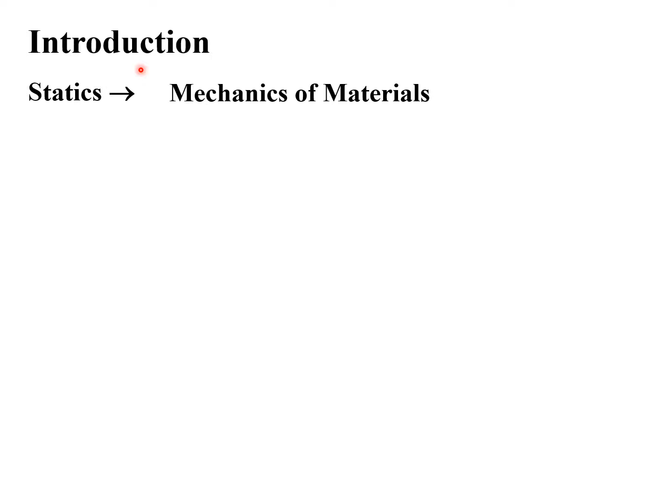The prerequisite for this class is statics, but statics itself is not enough for mechanical engineers or many other engineering disciplines. We have to go from statics to actual mechanics of material, because in statics, when we deal with material or components, we often say the material is so-called rigid body. What does that mean? It means the material will not deform or break under the load you apply. But that is a highly idealized situation.

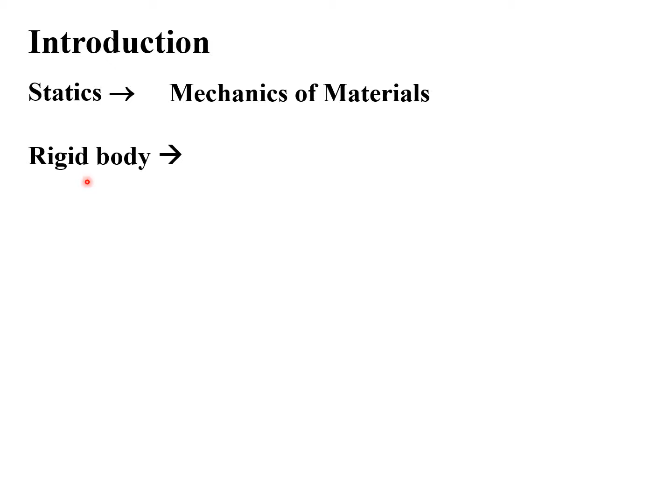In reality, we deal with practical engineering materials that have certain elasticity or plasticity. They change shape upon application of load, and when the load is too high, they may break or fracture in various ways. Because of this reality, our knowledge has to gradually evolve from dealing with only rigid body to practical engineering material, from pure statics, a highly idealized situation, to actual mechanics of materials.

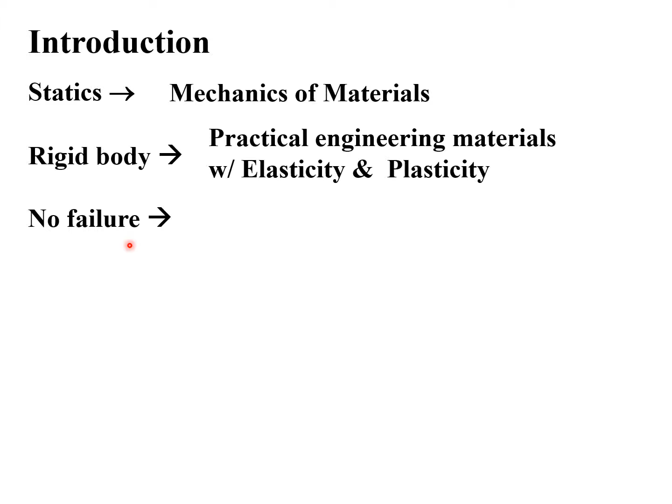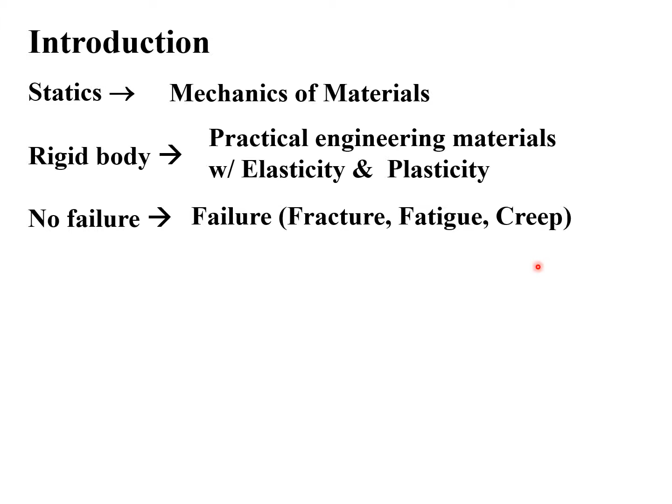When we deal with rigid body in statics, we don't even consider any failure. But in reality, as the load increases, at a certain point, no matter how strong or hard the material is, we will see failures in the form of fracture, fatigue, or creep. That's what we are going to cover in this class.

This class, statics and mechanics of material, will serve as an important foundation for many other advanced courses in mechanical engineering as well as related disciplines. For example, for your future mechanical design, finite element analysis, and synthesis of engineering mechanics, all these more advanced junior or senior level classes would be based on this class. That's why we teach mechanics of material after statics.

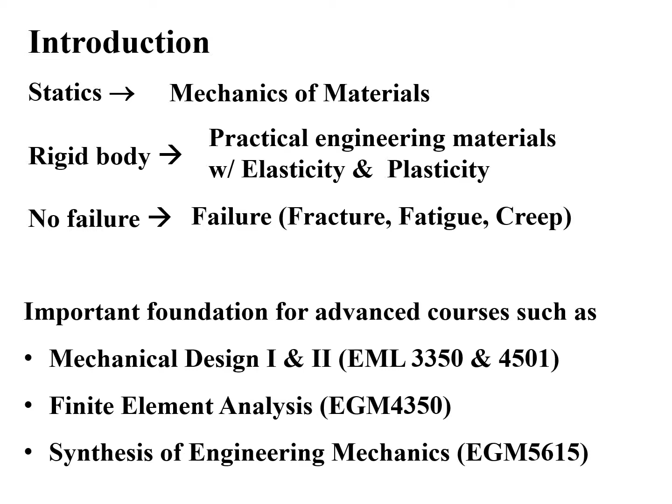Before we go into the content, let's look at some examples of so-called material failures, specifically mechanical failures. Here I have a photo of a collapsed bridge near FIU. From a mechanics point of view, it's a failure of the concrete and related cement and steel material that engineers use to construct this bridge. That's an actual example of failure of material under certain load.

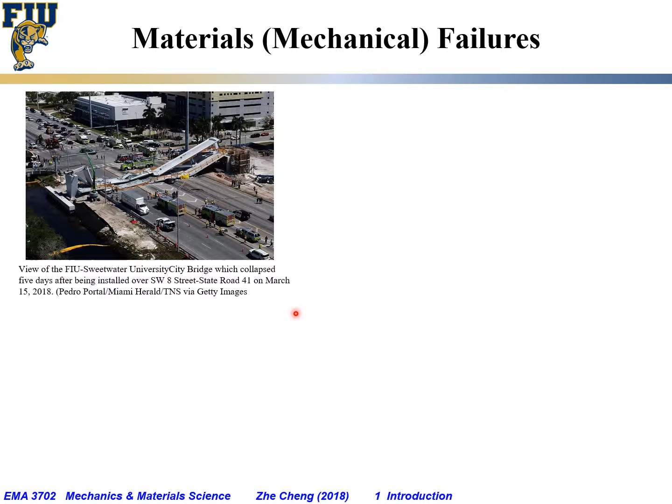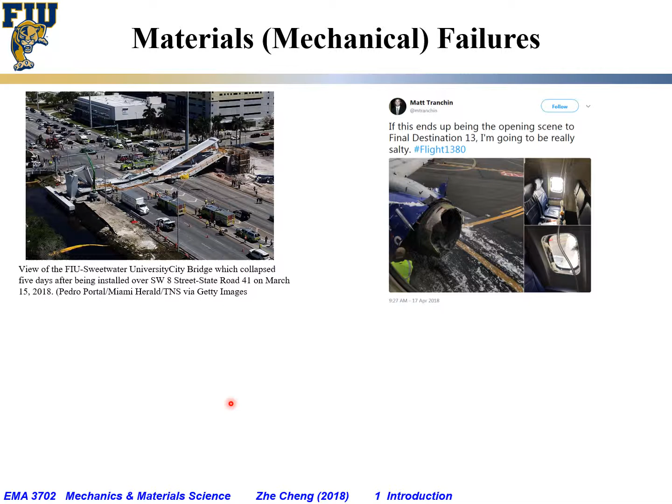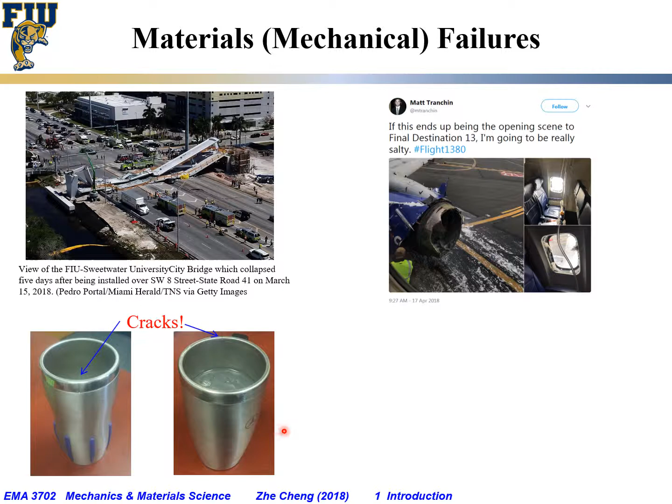As an engineer, we need to know what the design limit is, from a material point of view and a geometry point of view, when we consider different applications, so that we can design safe structures and safe applications to avoid these catastrophic failures.

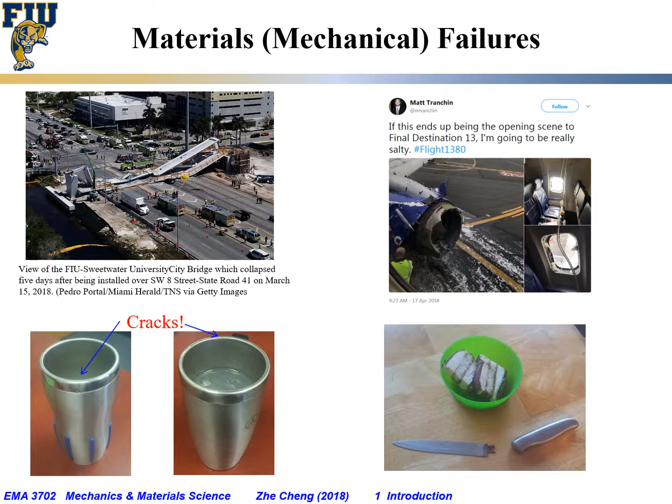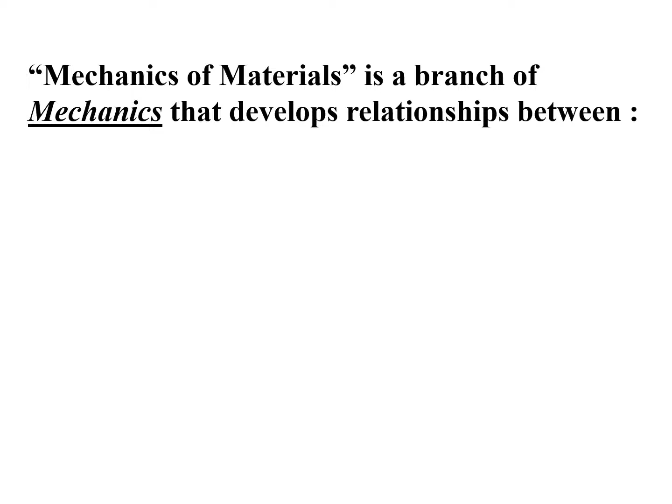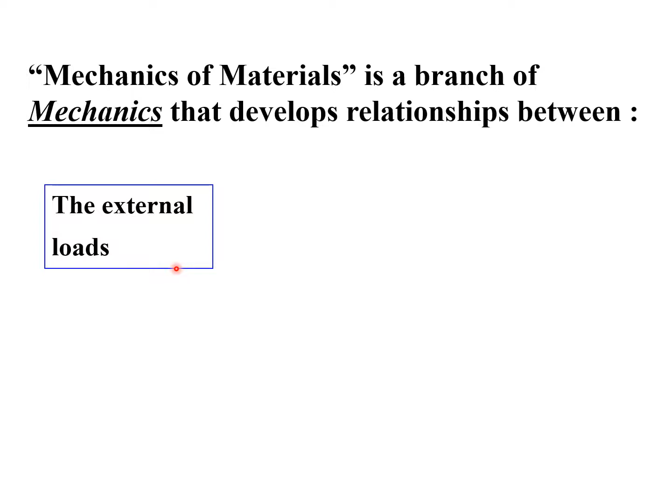So, what is mechanics of material? Well, it is a branch of mechanics that develops the relationships between, on one hand, external loads, the force that you apply to a component or system, and on the other hand, the internal force intensity, or stress, and the resulting deformation or change of shape, strain, in the material, or even failure, which people sometimes call fracture or breakage. The relationship between external load, internal force intensity (stress), deformation (strain), and even failure - that's what this course is about.

In Wikipedia, there's another definition. It says strength of materials, also called mechanics of material, is a subject which deals with the behavior of objects subjected to stresses and strains.

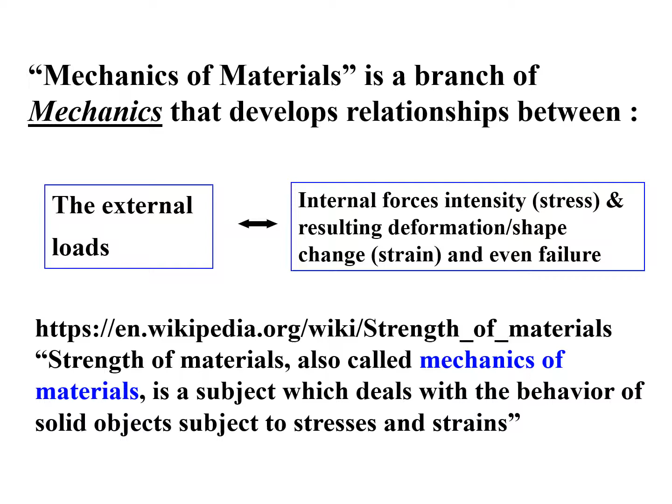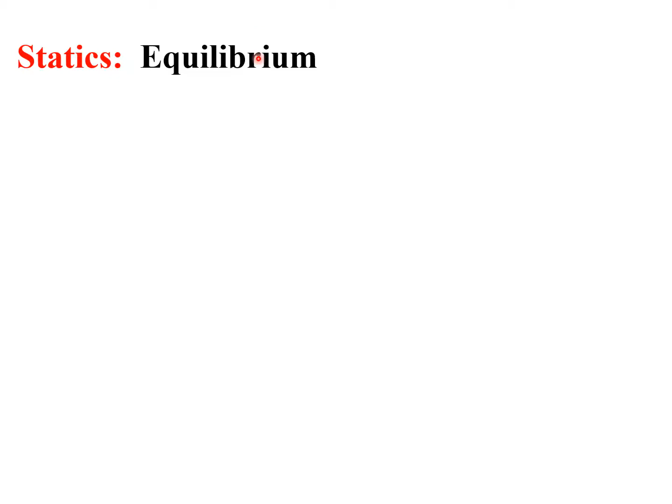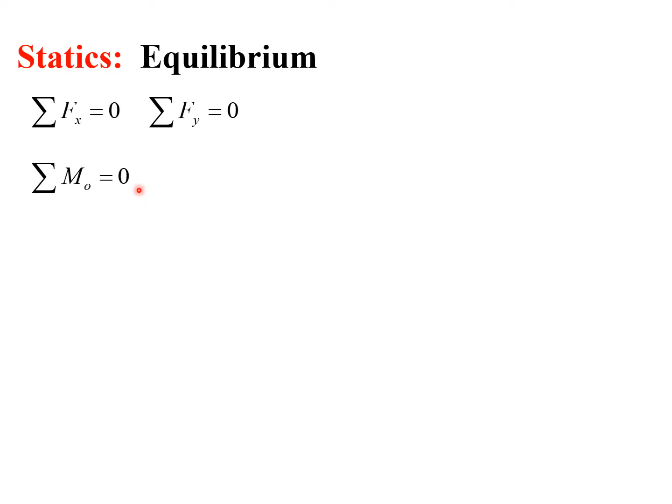So for statics, in that class, we primarily dealt with equilibrium. What does equilibrium mean? It means balance of force along the x direction, along the y direction, maybe sometimes along the z direction, as well as balance of moment. These are the set of equations we got from statics.

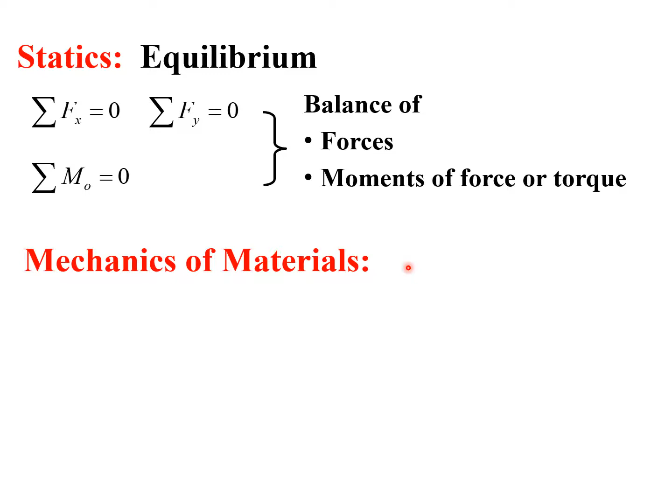On the other hand, when we move to mechanics of material, we are going to deal with something in addition to balance of force and balance of moment. For example, we'll deal with the so-called stress and strain for practical engineering components under load. We'll explain what stress and strain mean.

We will also deal with some so-called statically indeterminate problems. Statically indeterminate means problems that cannot be solved based only on balance of force and balance of moment. But when we start to consider something else, the geometry, we can now solve them.

In this class, we'll also deal with the deformation or change of shape of engineering components under practical load. In some cases, we may even have to deal with yielding, so-called plastic deformation, and eventual failure, the breakage of engineering components. These are the things we are going to deal with in this class, as opposed to rigid body, which is dealt with in statics.